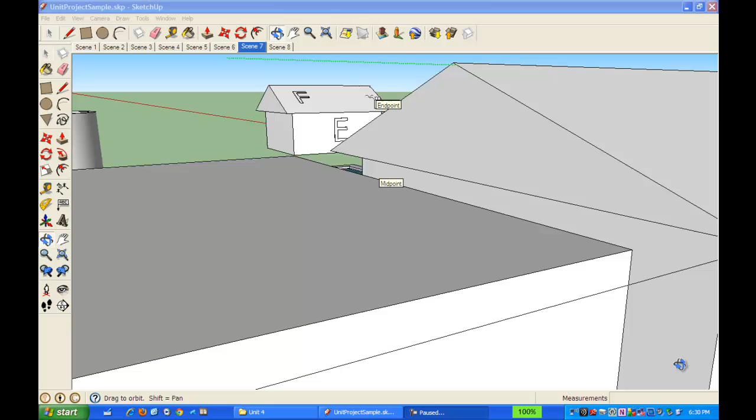This tutorial is going to show you how to put a roof so that it sits exactly on top of the rectangular prism which makes up your house or your garage, or whatever building structure you're going to draw, and to make sure that your house roof has an even overhang all around. So I'm going to quickly show you how to do that.

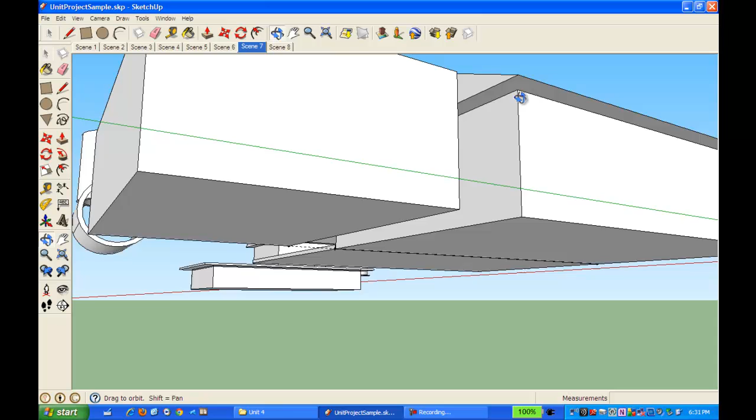Once you have your house, in this case this is my garage that I'm drawing, I have my rectangular prism part all done. Now I'm going to use my tape measure, and I'm just going to start at this end point here, and come out on my green axis 1 meter. That means I want a meter overhang on this side of my roof. Then I'm going to come out from this guide point on my red axis, 1 meter as well.

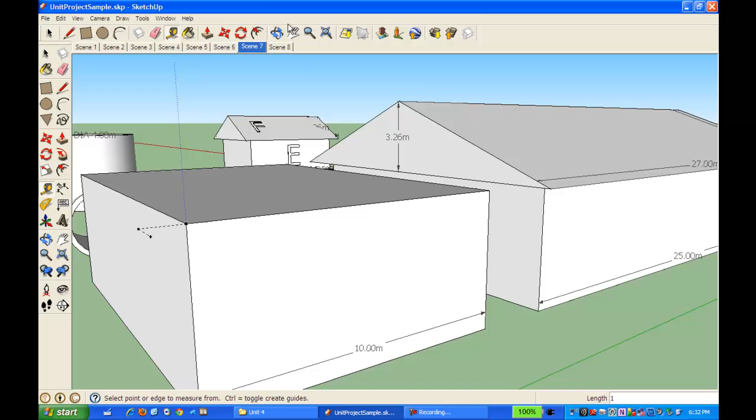And so now I know that when I draw my line, I'm just going to orbit around here so you can see. When I draw my line, I'm actually going to be drawing a meter out from the side and a meter out from the front of my garage. So I'm going to get my line tool.

If we notice the measurements here, the garage is 10 meters wide, so I'm going to start at this guide point and go out on my green axis. 10 plus 1 meter on either side, so I want to go 12 meters. I'll type in 12 and hit enter. And so now the edge of my roof is sitting 1 meter out from the front of my garage, and it's 12 meters long.

My next thing is I want to draw the peak. One of the important things is I want to match it up to the height of the peak on this house. This house is 3.26 meters high from peak to the edge of that line. So what I'm going to do is make sure I draw that same thing.

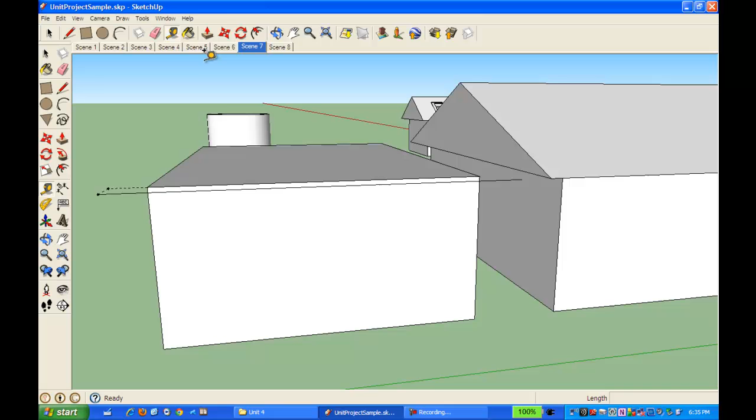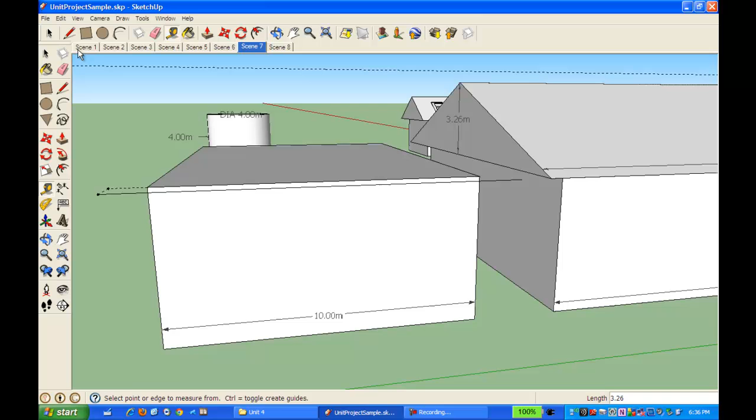So I need to take my tape measure tool, and I need to go to this line that I just drew, and I'm looking for the midpoint of that line. I find the midpoint, click there, and I'm just going to draw straight up on my blue axis. Make sure I'm on my blue axis - it just wants to jump around to my red. Once I'm at my blue axis, I'm going to type 3.26 because that's how high I want my line to be.

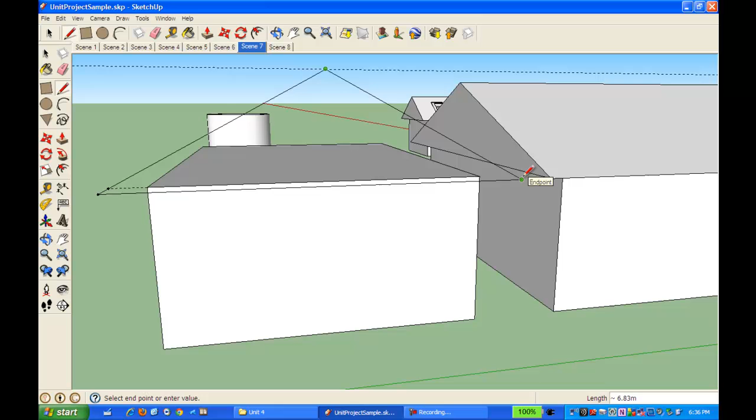So now I'm going to grab my line tool, my pencil tool, and I'm just going to draw this from this guide point. I'm looking for my midpoint on the line. I'm at that, and now I'm just going to go straight up on my blue axis to this line here - see how it says 'on line'? I'm just going to click that, and that's my first line. Then I'll draw from this endpoint to this endpoint on the line. Now I have the front of my roof.

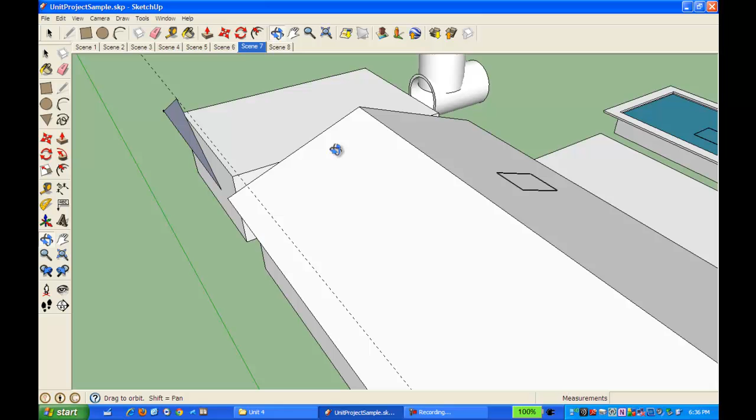I'll just zoom around here so we can see it clearly. And so there it is. This triangle is exactly 1 meter away from the edge, and all I need to do is pull it across so that there's a meter overhanging on the back.

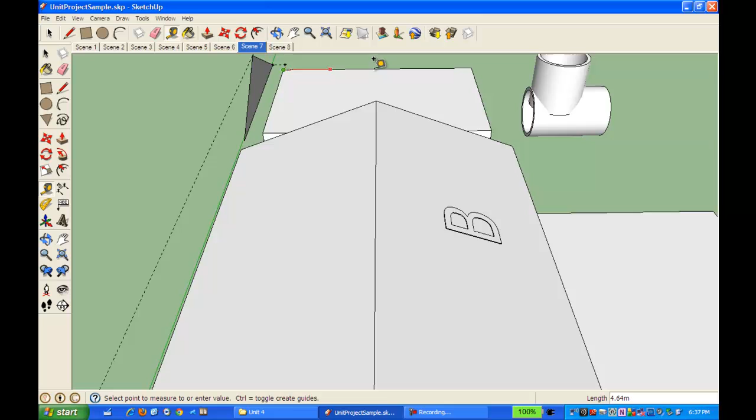So the last thing I want to do is grab my measuring tool and figure out how long my garage is. So it goes from there to there, and it shows 15 meters. So I need to make this 17 meters long.

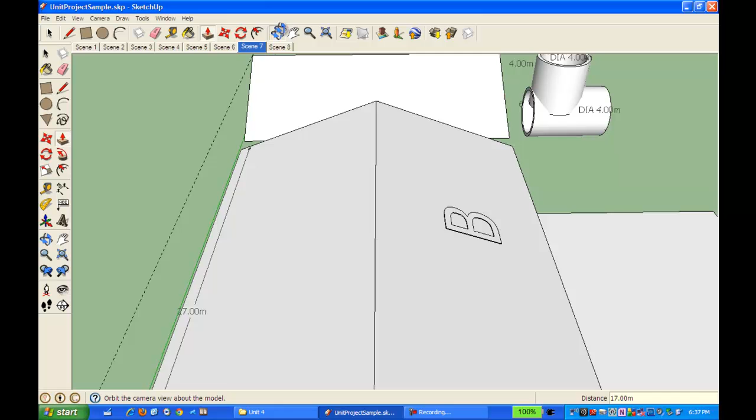I'll grab my pull tool, pull this roof part out, and I'm just going to type in 17 meters. And there, I've done it. I've now put a roof on my garage, and it's exactly 1 meter overhanging all the way around. Easy enough, and then you can get rid of all those little guide point lines and everything. And that's how you do it.